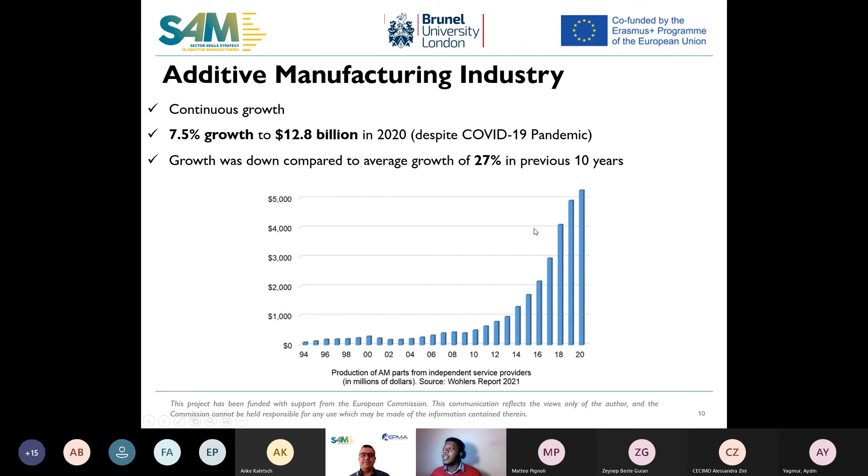One of the other reasons for this growth is that AM is being applied across different sectors. I've only selected a few because there are many sectors where AM is being applied. You can see it's being applied to construction. A cool one I always like is the food industry—you can now 3D print pastries and bakeries—and the aerospace and automotive sector.

This is a sector that is utilizing AM strongly. Now, at the bottom of the screen, you can see it's been applied in the health and biomedical sector. I mentioned the PPE aspect, especially because of the pandemic—we had to print masks and face visors with 3D printing. So it's been applied across the health sector, and the main reason for this is customization—you can actually make things that fit individual people. That's one of the attractions of AM, and hence why it's continuously growing.

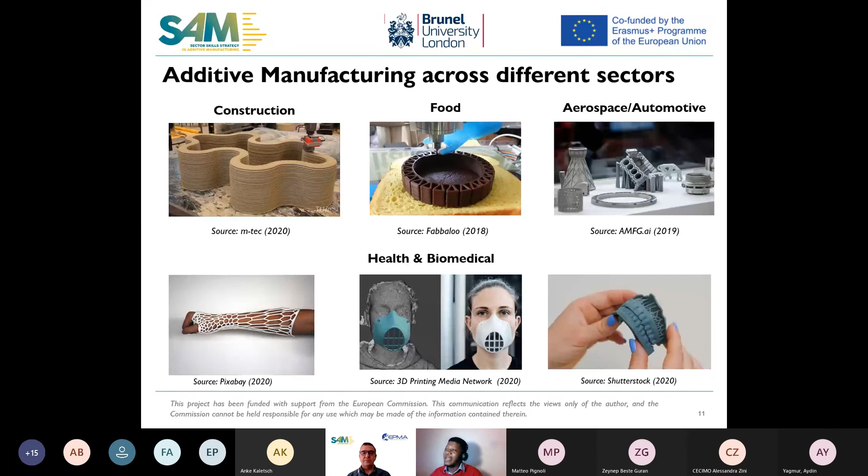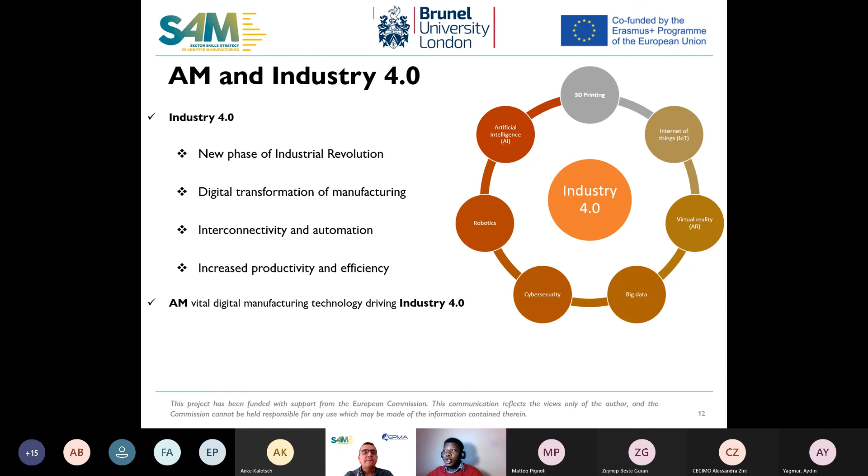So now let's go to AM and Industry 4.0. A lot of you might have come across the fourth industrial revolution, this new phase where things are becoming more automated and more interconnected, with the aim of increased productivity and efficiency. That's where AM comes in—it's one of these factors, part of AI, robotics, but 3D printing is a major factor of Industry 4.0, because you can create less waste, making it more efficient, enable customization, and create complex geometry. So the key point is that additive manufacturing is a core component of this new industrial revolution.

So what are some of the things you can do with knowledge of AM? You can go from being a designer or process engineer to more hands-on roles like an AM operator and technician, or even like me, an AM researcher and scientist, where people develop and improve new AM materials and processes. This list is not exhaustive—there's a plethora of opportunities available with knowledge of AM.

Now let's think about the fact that it's not all rosy—there are some challenges with AM, given its fast pace and changing demands. One thing researchers found is a shortage of skilled AM professionals with multidisciplinary and comprehensive skill sets. AM has different components: you can come from the design perspective, selecting suitable materials, and there are different AM processes and equipment. Then you have to think about whether the product, once produced, is good enough, and what happens at end-of-life processing. There's a lack of professionals who can think of the best material or process and then consider what happens to the product afterwards. If you can understand the relationship between these different factors, it will lead to greater innovation, optimization, and application of AM across different sectors.

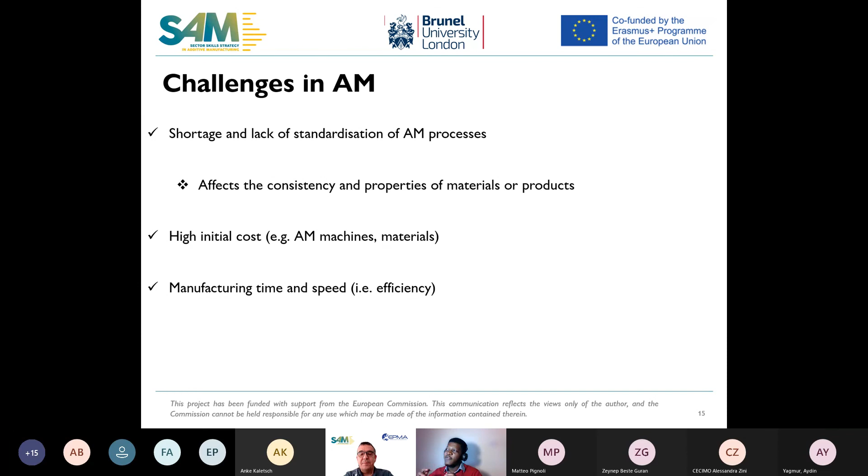So it's improving, but these are still parts of challenges. If you're sleeping, please wake up now, we're almost there. I just have one more slide to go, so this is the time to wake up, because I'm just going to the final slide and top tips, okay?

So my advice and top tips. First, if you're a young person in AM looking to start working in AM, try to connect and follow AM projects. Follow people you look up to in the field and organizations. For example, SAM is an AM project you can follow on social media. This keeps you informed of developments and opportunities in AM. With SAM, all opportunities, like new courses, will be advertised on social media. So if you follow such channels or projects, you become aware of what's going on.

Be proactive and take opportunities. For example, myself, I didn't start with a career in AM. I did a mechanical engineering degree, but I've always been fascinated about improving materials and manufacturing processes, and here I've become an AM professional now.

Another top tip is to think of those challenges discussed earlier, things like having a multidisciplinary skill set - not just one aspect, but being able to relate it, be more comprehensive, and think of ways to solve or improve them.

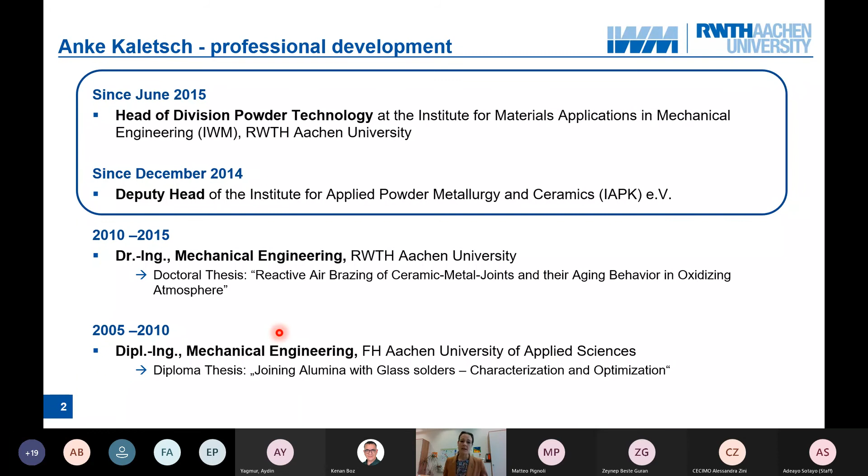What I forgot on this slide is that I worked as a student assistant during my studies. If you plan a career at the university, or plan to do a PhD, I would highly recommend applying at some institute as a student assistant, because then you can demonstrate that you're doing good work and are interested in research. I think that's the best possibility to get a position as a PhD worker afterward.

A little bit about my current position as head of division for powder technology: in total I have 10 scientific staff members working in 3 groups. The working groups don't look like they have something to do with additive manufacturing, but additive manufacturing is a big part of all our work.

We don't only work in the field of additive manufacturing, we also have other powder technological production routes, but additive manufacturing is really a big focus. What I'm doing all day is attracting third-party funding, which is a big topic, because the scientific staff members need to be financed, mostly through research projects.

My responsibility is to control the projects and all the orders within the division, and the strategic development and promotion of the division. That's important, research strategy, because the field of additive manufacturing is so wide, there are so many technologies in that area, so you cannot do everything. You need to focus on some technologies, some materials, or something else.

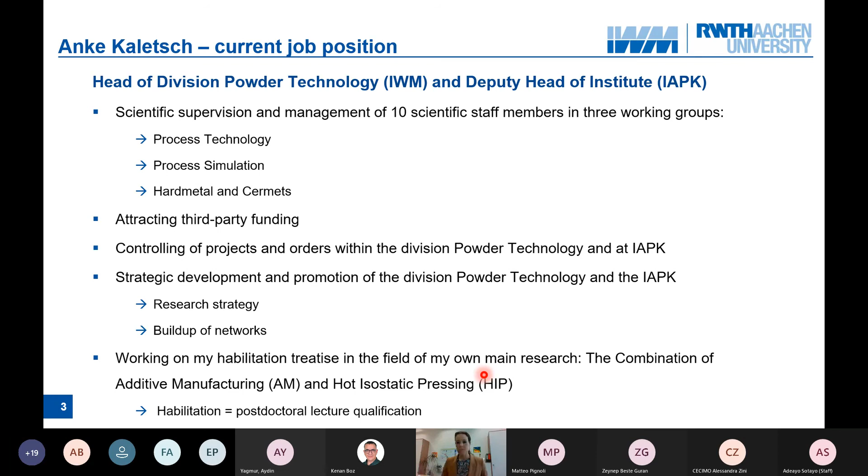Now I would like to speak a little bit more in general about what it means to work at a university. So when you plan a career at the university, that is mostly connected to scientific qualification, as I said, the PhD, for example, or after that, a postdoc, the postdoc period.

So in Germany it's a habilitation, but in other European or countries all over the world, it could be a postdoctoral fellowship, or I think it's the same level like assistant professor in other countries. So the main work is research.

You will have your own research topic and you will be working on research projects. You need to publish your results in journals, you need to present your research results at conferences, and you need to work together with partners from industry or from other universities, and with students, with student assistants, and you need to supervise bachelor and master theses.

And for getting the research projects, we first need to apply for these fundings. That means we need to develop new ideas and topics for research projects, discuss these topics with other researchers, maybe presenting the ideas, and finally writing the research proposals.

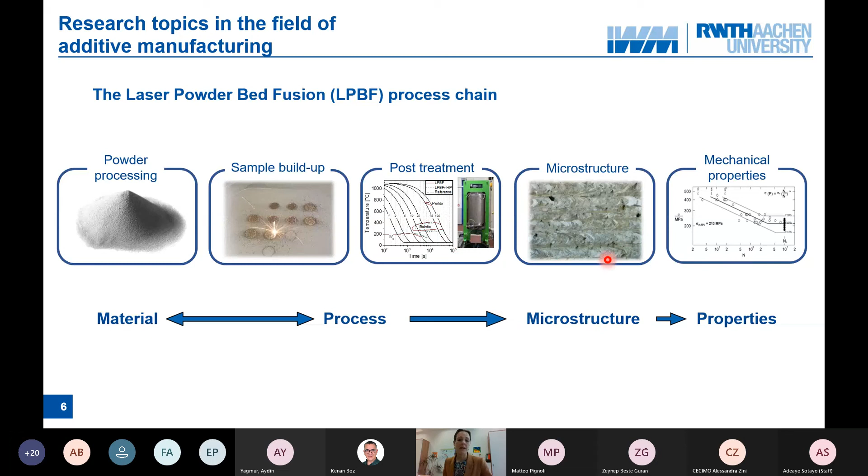On the next two slides I would like to show you a few examples on material development and also on process development. That means how a change in the material influences the processability and also the microstructure, and how a post-treatment by hot isostatic pressing influences microstructure and mechanical properties, but can also complement the sample buildup process.

And motivations for material development. What are the motivations for materials development in additive manufacturing?

So we have some materials that are not very well suited for the process. That means materials that are difficult to manufacture, like very hard materials such as tool steels or even high-speed steels.

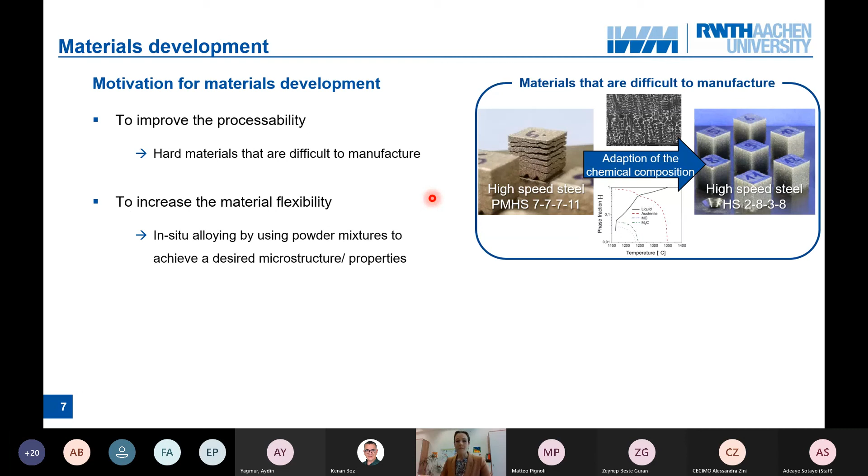Due to the process, due to the very high solidification rates and high thermal gradients, you often get samples like that, with a lot of cracks. We adapt the chemical composition of the material to get a material that can be processed crack-free, and therefore we need a close look into the microstructure to find the reason for cracking. In that case, it was the high tungsten content in the material, which forms strongly connected carbide networks, and across these networks the cracks were able to propagate through the material very fast and easily.

With thermodynamical simulation, we do material adaptation. A second motivation for material development is to increase flexibility. Additive manufacturing is known to be very flexible concerning geometries, but it is very limited concerning materials, because we only have some standard powders, and the range of these powders is limited. To increase flexibility in materials, we have an approach to work with powder mixtures, meaning we mix standard powders to get new alloys.

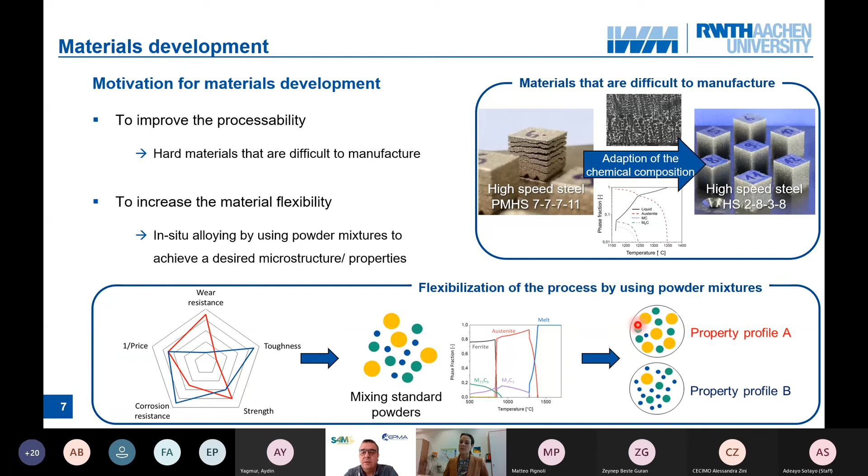For that, you first need to define your property profiles. Here we see two property profiles, one in red and one in blue. Then we take standard powders and mix them in different compositions, accompanied by thermodynamical simulations to see what happens at the solidification state. And then we get different materials with different property profiles, with the same standard powders, only by mixing them in different compositions.

And now I see I'm already over time, and this is my last slide, about the combination of laser powder bed fusion and hot isostatic pressing. But with a view to the time, I will skip that slide. I think you will get the slides after the webinar, and you can have a look and contact me for any questions, or we have the question and answering session later, and you can ask me.

Actually, Anke, we have time. Just for 3 or 4 minutes, you can explain a little bit more about what this is. Okay, that's perfect, thank you very much. On my clock, it is 2 minutes over time. Okay, perfect.

Very short, HIP is hot isostatic pressing. That means it's a post-processing for materials that exhibit probably pores from the production process. For example, cast blades from aircraft turbines are HIP post-treated by standard. You can also post-treat AM samples with porosity using hot isostatic pressing, and you can close the porosity with hot isostatic pressing.

That is the first motivation of that combination, because you can improve the mechanical properties, especially the fatigue properties, because in fatigue these pores are defects and decrease the fatigue strength. By having the possibility to reliably close porosity by hot isostatic pressing, maybe the relative density before the HIP process does not need to be 99.9%, because such a high quality requires a very long process time.

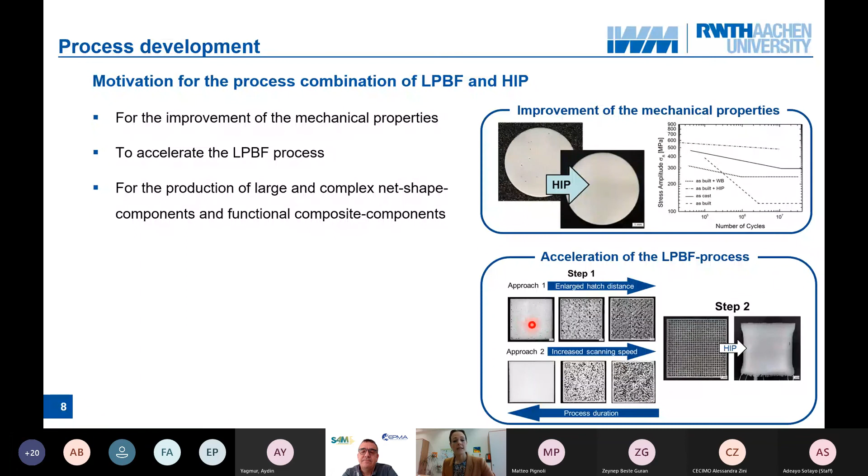Therefore the second motivation for the process combination of LPBF and HIP is the acceleration of the LPBF process, with approaches to build samples with more porosity but faster, and then HIP them afterwards to have fully dense samples after the HIP process.

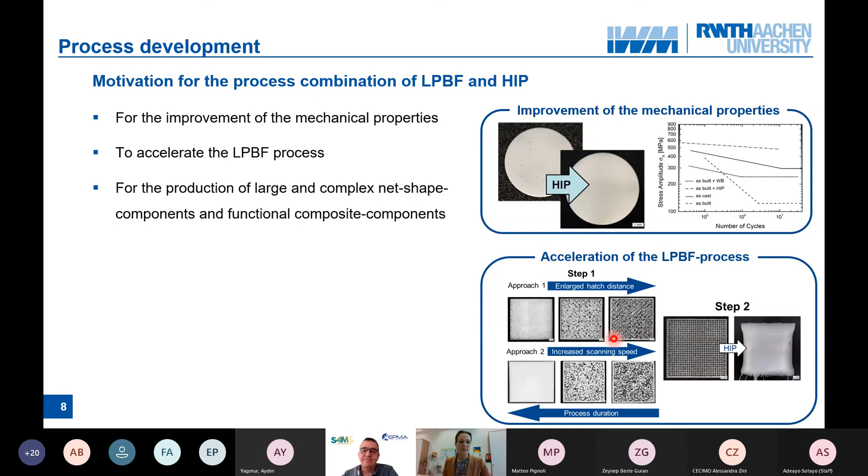You can increase the porosity with two different approaches. The first is the enlargement of the hatch distance, meaning the distance between the single laser lines during build-up. The second approach is simply an increase of the scanning speed. Both will result in more porosity, but both will also result in shorter building times, so you can save process time in the LPBF process. The only thing you need is a dense shell, because otherwise you cannot densify the samples in the HIP process.

And that leads to the third approach, which is that you only build the dense shell with additive manufacturing and fill in the powder afterwards. Then you close the capsule, evacuate it, and put it in the hot isostatic press, and then you get the final component.

And when you accompany that with finite element simulations, you can design the shape of the capsule so that you get your desired geometry after HIP. There are some simulation programs that are able to predict the shrinkage during HIP, and with these simulations, you can design the capsule before HIP to achieve the desired geometry.

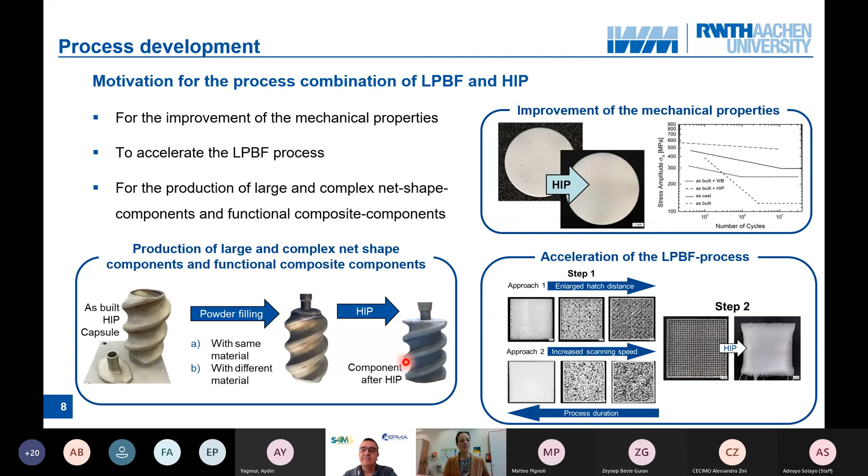You do not need to fill in the same powder as the capsule material. You can also fill in another powder, which offers the possibility to build the capsule out of a functional material, for example a wear-resistant or corrosion-resistant material. Then you can let the capsule stay on the component after the HIP process, as a functional coating. So that means you print your coating in advance and fill in the component afterwards.

Yeah, those were my examples and my experience in a career at the university. If you have any questions, I would be happy to answer them.

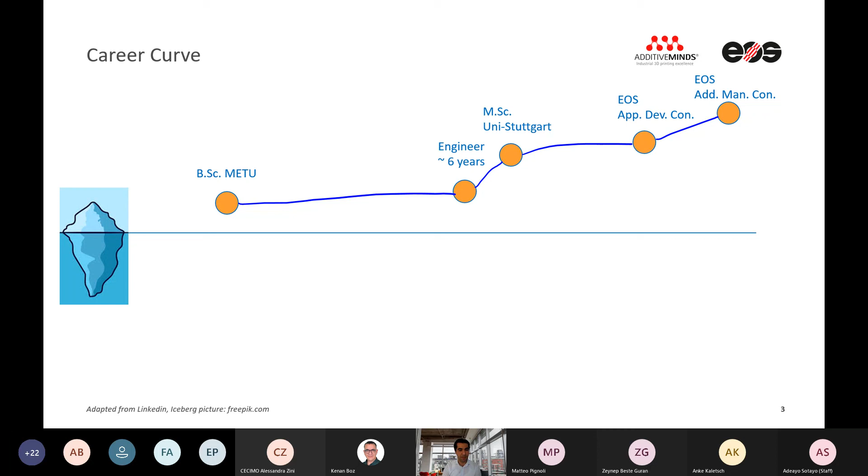This is, let's say, my LinkedIn CV, and I'd like to share the portion of the iceberg that's under the sea level. So here you see another graduation and the timeline. This is where my classmates graduated, and I had some additional months to graduate.

So my graduation was not at my expected time. This was a lowlight. Then I started a Master of Science at my university directly, but after some months, I decided to quit and started job searching.

I searched for a job, did some interviews, but couldn't manage to find a position. So I quit the job search and started my compulsory military service and spent some months there. Then again I had a job search period, which you cannot see on the LinkedIn. And then I found a job, worked 6 years.

Then I started a Master of Science in Stuttgart, and then again a job search period for 1 year, and afterward I got my job and continued working in additive manufacturing.

So the message I'd like to give is that every career, or most careers I've seen, have some lowlights, some challenging times. There are times you don't know what to do, or you take some challenging decisions. I think this is very normal, and it shows that you have a normal career path.

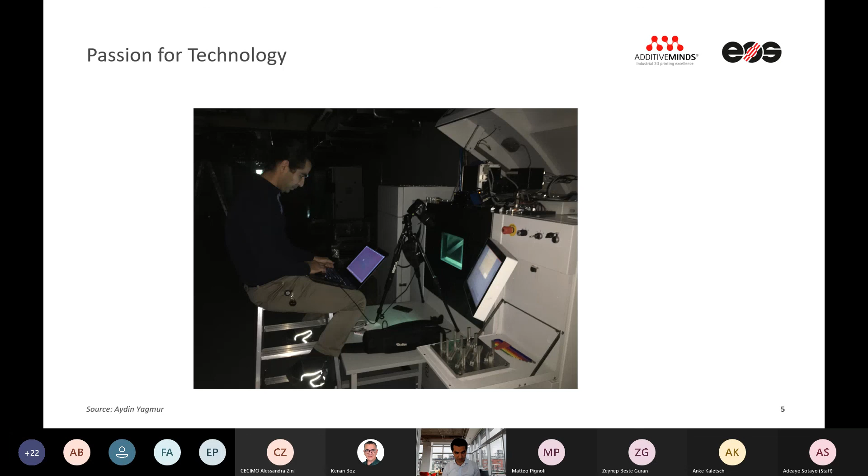I would like to summarize some key messages that helped me and other people go on their careers in a successful way. I would like to start with social and environmental impact. It always makes sense, and it is our responsibility to evaluate the social and environmental impact of our jobs, what we do, and we should work in a way that has positive impact on other people's lives and environmental conditions.

Of course, ethics. We should always follow ethical rules and try to maintain good ethical guidelines. Whenever there is an open question, you can ask your seniors or colleagues, take their opinions, and then make your own decision.

One of the other important highlights is curiosity: asking why, challenging standard applications and standard procedures always brings new topics to you. You can learn and challenge your colleagues and academic advisors, always ask why. Sometimes you'll hear 'we always do it this way,' but that's not enough. Ask why, because at some point somebody made a decision, and you can learn the reason and open up new areas for yourself.